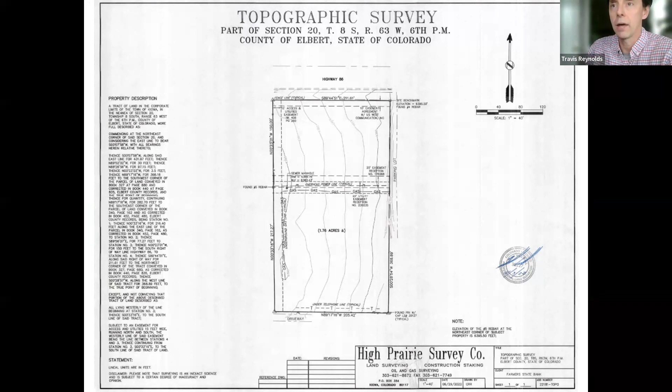This is a demonstration of the survey for the current site, highlighting some of the encumbrances from easements that exist on the site for utilities. We'll show those in a little more detail in a couple of slides.

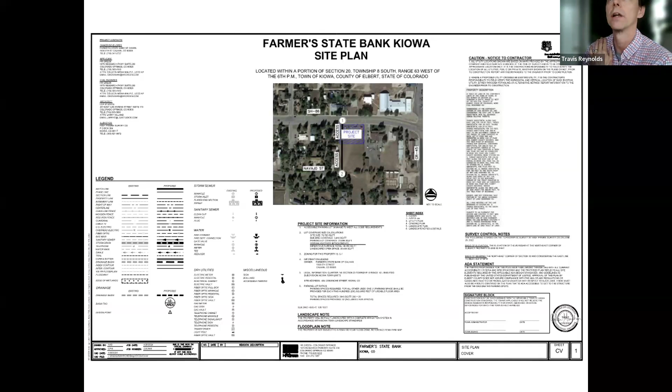This is the general look at the site plan. We're highlighting in blue the proposed location of the building, approximately two-thirds of the way back from the front of the site, or the northern portion along Comanche. The main access is on Comanche with a negotiated and designed right-in, right-out traffic access point near Comanche Street, as well as a secondary access to the rear of the site onto Navajo Street.

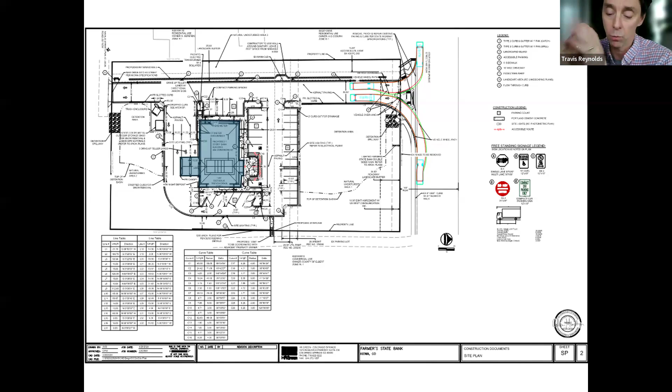Parking is depicted for the structure in accordance with the zoning code requirements. On the southern portion of the building, you'll see the drive-through lanes and the drive-through window area with a canopy cover for two of those lanes, where an ATM will be located as well.

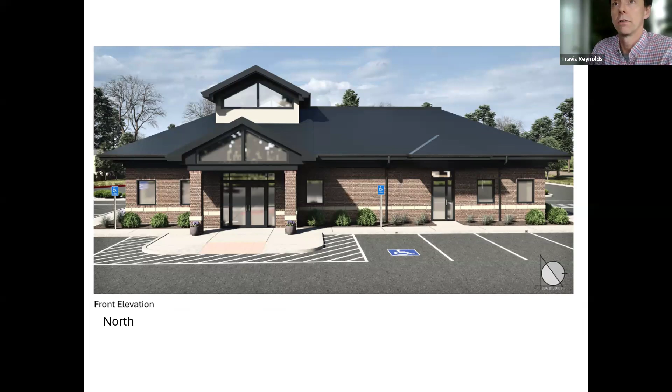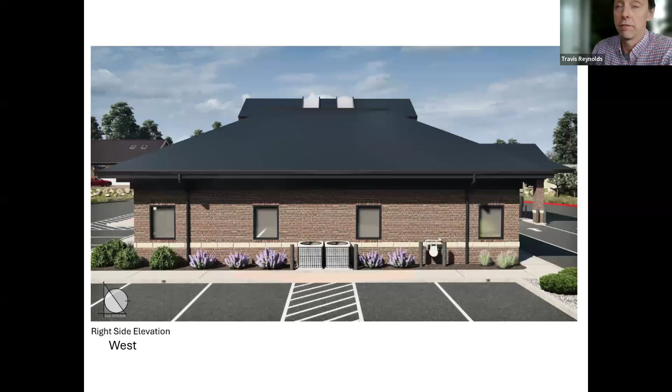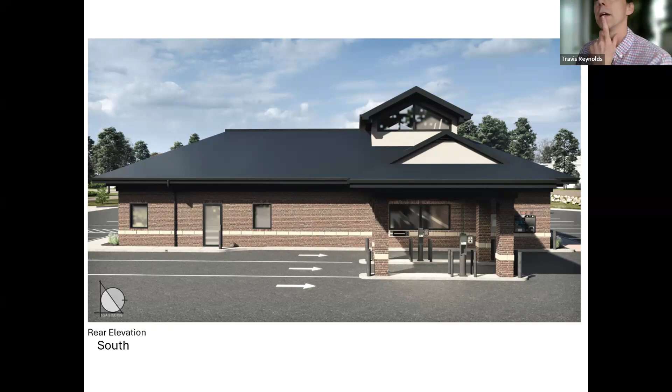This is the south elevation for the site, depicting the drive-through lanes, the three drive-through lanes, the canopy hanging out over two of those drive-through lanes, and the proposed bank window as well as the ATM equipment here on the south side rear of the structure.

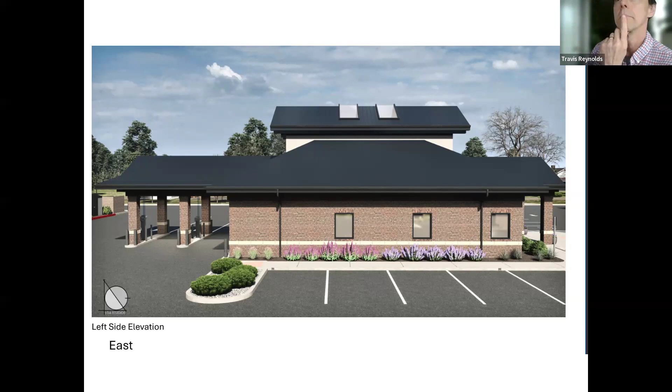And finally, the left side elevation, east. This is the one that's facing the Elbert County Motor Vehicle Department. You'll see the landscape plantings here that ring the building and make it look very nice.

Sorry, is there a question?

Questioning your landscape choices. We have a very heavy population of deer. They are brutal on everything—plants. Yeah, we do.

Okay, we can discuss that with the applicant between now and the public hearing with the town board, and see if there's anything we can do to swap out some of those species proposed.

Our next slide here is basically a summary. The Planning and Zoning Commission's charge this evening is to provide a recommendation to the Board of Trustees. Those guidelines provided by the zoning code are to look for that recommendation for approval with conditions, or for denial for reasons stated. That's what we'd be looking for you to forward to the Board of Trustees, which we would take forward on the 14th of May.

As we outlined in our staff report, the staff's recommendation is to recommend approval with conditions as provided in the staff report and in accordance with the findings outlined there. We can discuss those considerations for recommendations. After that recommendation is forwarded, it will go to the Board of Trustees for their consideration on the 14th of May.

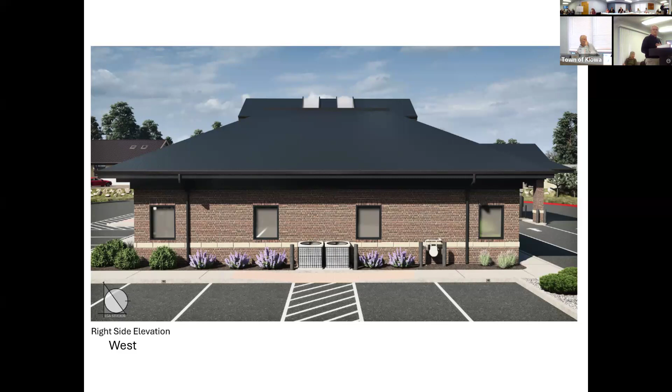The building itself is set back a ways from the street, primarily because of the utility easements. The electrical has probably been the biggest issue, that secondary pink line coming off of Comanche Street. That is pretty well set in stone. As much as we've tried to look at relocating or moving it, it's not going anywhere, so we've had to work definitely around that spot.

One of the town's considerations from earlier review was on parking. The town has a parking width of 10 feet; we originally planned for 9-foot wide spaces. If we go to a 10-foot wide space, we basically lose 4 parking spaces, but it's something we can easily accommodate. Vehicles out here in this part of the country are many times larger trucks, so it might make total sense to do that. We just want to make sure the bank employees have a place to park and it's not just a huge parking lot out there, so that's something that can be accommodated.

Landscaping-wise, I might have to lean on Colleen a little bit. I know there have been some adjustments, and there were comments about the deer. We can certainly go back and look through the landscape plan to address that. My own house, I can't grow flowers or anything of that nature there either, so I think we can definitely address that.

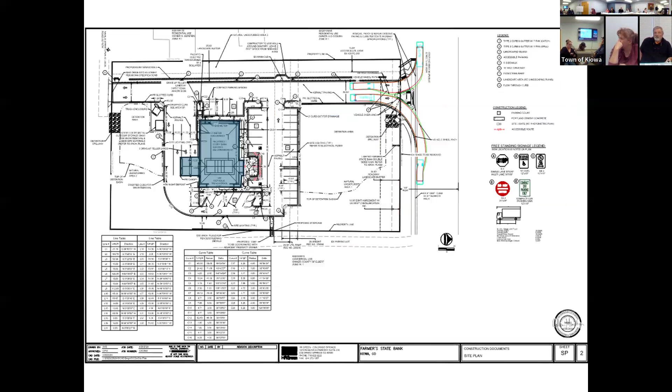Can I say one thing to Travis? Travis, you guys have the water line going out to Highway 86. I spoke with the town, Paul, and he said we could bring the water line in off of Navajo Street, which would make it a heck of a lot easier and a lot cheaper instead of cutting into Highway 86. I just wanted to make sure that's all right with everybody here.

So you guys don't hold my feet to the fire for changing stuff. Paul would be the expert in that, as to where the water lines go and where the best access points are. So if he says it would be better or easier to come in from Navajo, well, we would have to rely on his expertise on that one. He's a great guy, he said that'd be fine. Yeah, I just got a pothole for the water, so when we're excavating, I think that's about it.

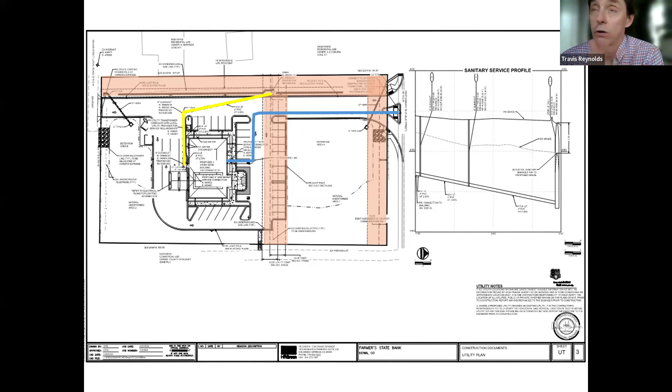So it sounds like that's a service line to the structure. I don't think we have to worry about it being placed in easements, as long as that's reflected in the plans and we can get it through circulation, having the civil engineer and possibly Paul review it so there's no conflicts. I think that'd be fine.

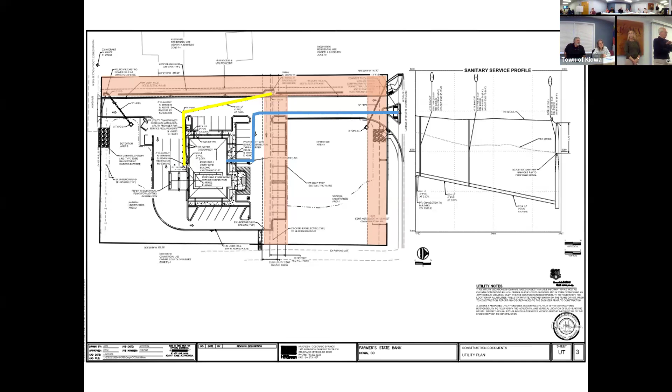I don't think we have any other questions, unless - I have a question on the screening of the dumpster on the backside of the property. Is that a wall or just landscaping? No, it's a wall that goes around it. So it blocks the whole dumpster like a three-sided wall? Yeah, and there's landscaping there too, as a buffer in addition. That's good, thank you.

Watch out for the raccoons around here.

How long is it anticipated before it's done, just out of curiosity? It's been a windy year, about a 12-month period typically. This month I'm gonna say we're probably going into December, 8 months is what I'm hoping. So we plan 12 months and hope to finish in 8. Let's just say a year, I was actually hoping to be done in 7 to 8 months.

When are you planning to break ground if everything goes through? We gotta go through this next, May 14th, that's when we have our next board of commissioners meeting. I'm hoping the permit will be just about ready right after that. If it gets approved by the town board, it should be right after that - they're gonna write a big fat check, well, two big fat checks. Then they should get their permit and be able to break ground pretty quick after that.

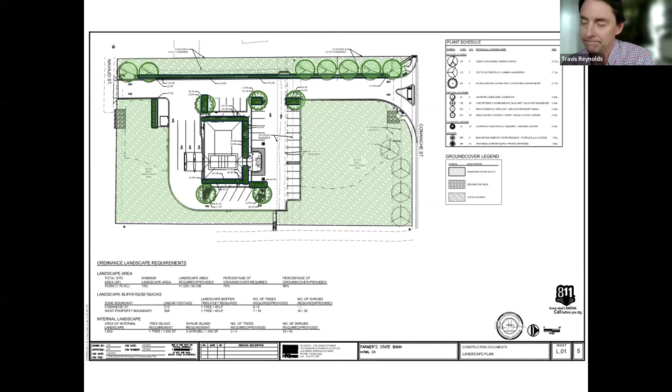Okay, Travis, your recommendation - can you go back over that so the board understands where things are going?

In our staff report, we outlined a series of conditions we felt appropriate to bring forward, given the roughly 90% nature of the plans and the various outstanding issues not yet settled. With all those recommendations for conditions, none were egregious, and we heard a couple more this evening, so we'd like to memorialize those and take them forward to the board. Our recommendations included the augmentation of the parking spaces, a discussion of the lighting standards, and an operational augmentation so that nighttime lighting is reduced.

Completion of the CDOT access permit and evidence of that provided, the screening standards for the air conditioning units on the west side of the site, and other referral agencies who had remaining outstanding comments, including Core Electric and the civil consultant for the site. Those are some basic things that need to be remedied prior to ultimately approval, if the town board so chooses.